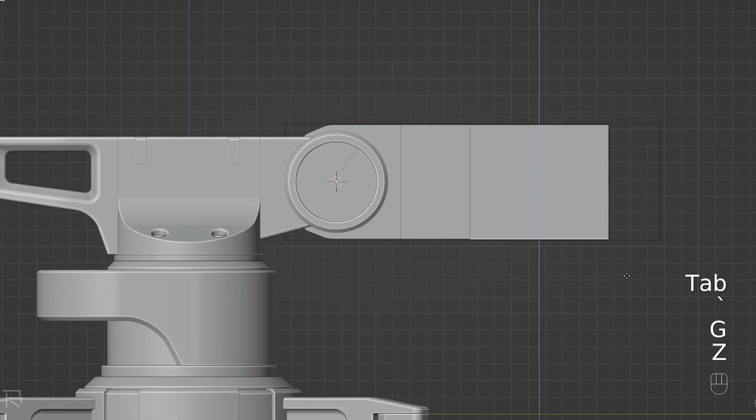Let's cut it here with a cube like this, okay? Then actually we could chamfer these corners. So chamfer them like that, and Alt X to mirror to the other side with Mesh Machine. If you don't have Mesh Machine, you can use Hard Ops for that. Here we could actually cut it like this and then mirror to the bottom.

So this cut is gonna be quite interesting here in the middle. We could use that. We could also cut it from the top to make it a little bit more airy. So, cut it somewhere here like that. In fact, we could just follow these edges here a bit closer, and then maybe here, and just bevel it a little bit here, maybe 8 segments or maybe 6, and cut. Cool. This will introduce some lightness to this structure.

Maybe it's a little bit too deep here. Let's move it closer. So I will scroll and GY and move it closer, so it kind of doesn't overlap with this bit in the front here. Maybe that's a little bit better. We can think about it later.

Here in this corner we could have some bevels, so I will scroll and grab this edge here and maybe bevel it a little bit. So let's say 8 segments. It's gonna be a little bit rounder and sort of a better transition.

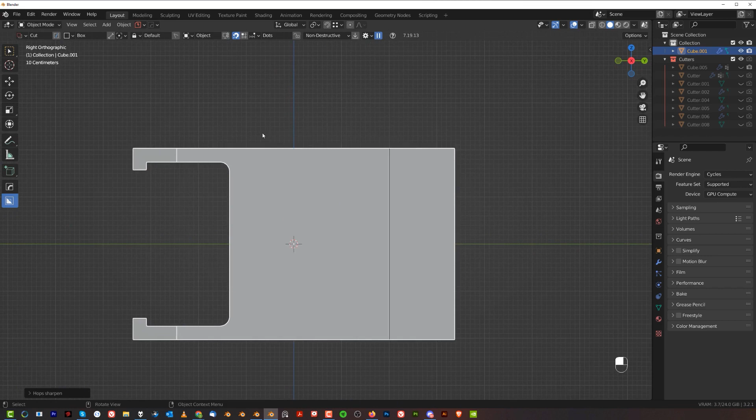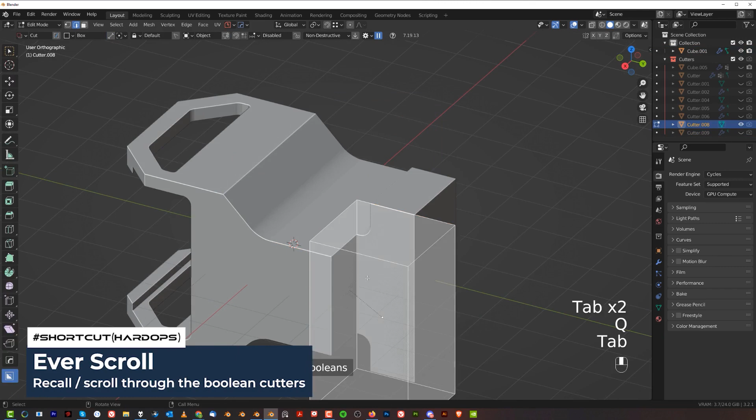So I'll click on sharpen, and now let's see, we could technically cut it in here with a bevel like this and going up, and then B and scroll and create like a beveled cut here. That's gonna be quite interesting, I think. This one could be beveled as well, so I will scroll and bevel this. All right, there we go. So you're gonna have this kind of nice transition here.

This is gonna be difficult to control shading with, but we don't really need a physical bevel. We can have a bevel shader. Through mask also we could add some loops here to give some support for this cut here. The same here, I will scroll and add some loops here, with Control R. So Control R and scroll to add some loops here, more support. It's gonna clean up the shading a bit.

Here on top, what we could do is use a bevel, but we can do it later. And here in the middle we could cut it through, so let's do it from the front, and we're going to grab a square and maybe cut it in here like this, and then bevel it, and press Tab, B and scroll it to maybe 8, maybe 10 segments is fine, and bevel it from the front here.

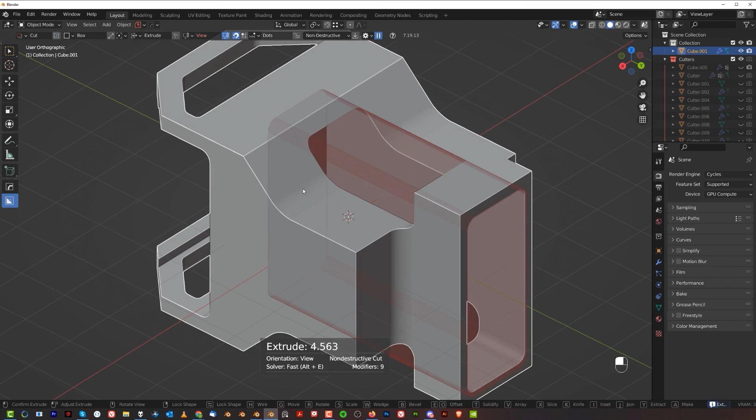If your computer is slowing down, what you can do is turn off the bevel. Should help a bit, okay? You could press Q for quad bevel, so B and Q to bevel it on all edges, so it's gonna get beveled here as well. And we got a cut here on the bottom. That's actually quite interesting.

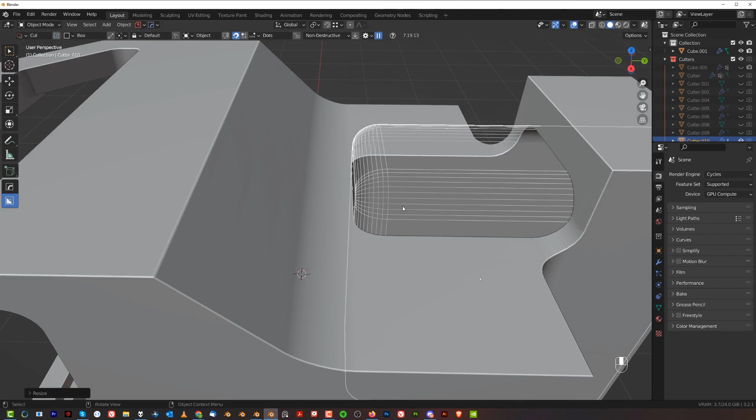It may be a bit too thin here, so we can just ever scroll it and kind of scale it in a little bit, and SY and scale it in here. And make sure that it doesn't actually encroach on the bevel here, because this is going to be an absolute bastard to fix. So if you don't need a headache, don't create yourself headaches, okay? Cool, this is pretty good.

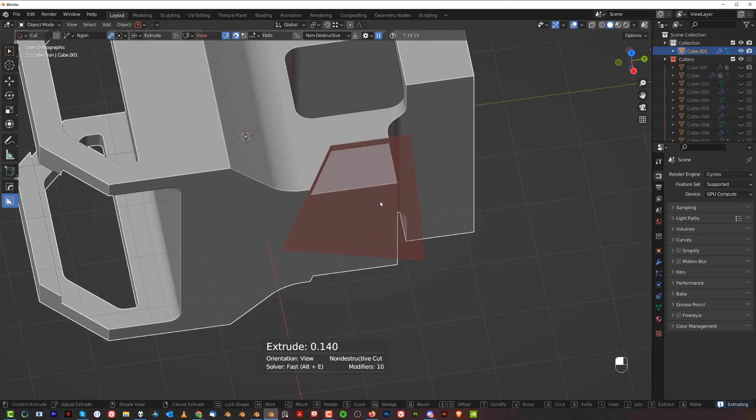Here on top of this, we could have another cut, maybe something like this here. So let's just cut it through E and cut through it, and then press B for bevel. Turn off quad bevels by pressing Q and create this kind of a cut here. This is interesting, and this could be beveled. So now we're going to apply everything. So ever scroll and operations multiply.

Select this one and bevel it. There we go. There's some problem on the bottom as well. So let's remove the double edge. Let me see what's going on here. This one, right? Yeah. There we go. And one more time. Perfect. Alt X to the other side to mirror it.

We don't need any of these here. So we could technically use mesh cleanup, but I don't want Hard Ops to remove too much geometry, so I'm just going to do it manually. And here we can bevel this as well and mirror to the other side, and there you go.

Here in the back we could have a large opening for a circle or another square. So let's go to square and let's do something like this here. Select that, draw a rectangle here, press B for bevel, and then J to connect it, E, and insert it a bit inside and then outside here. Create this kind of like a pocketed sort of, I don't know, connector or something. And I'm gonna run power save.

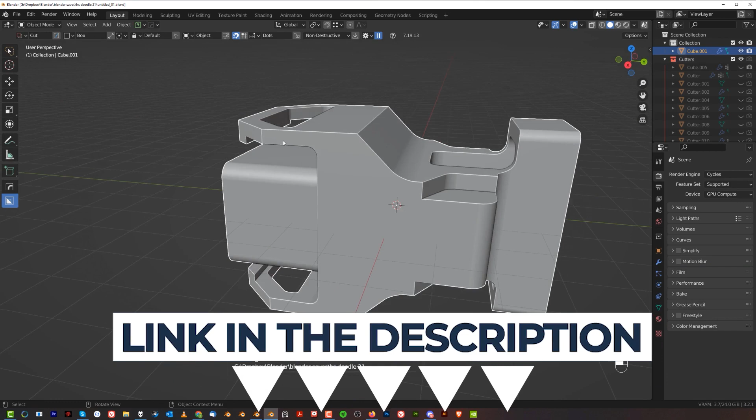Here we don't really need that. I'm gonna try to run cleanup, so operations clean mesh. It's gonna clean all the junk that I don't need. Let's run a bevel so it's gonna nicely kind of flow into one another. This one also could be beveled. That's a bit more tricky to do.

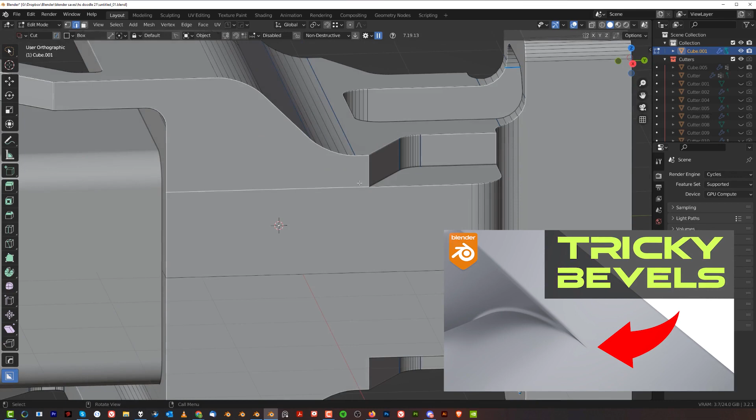We're gonna do that in here. So we're gonna give this bevel something to run on, create something like this, and then clean the mesh, and symmetrize it to the other side, and you got this kind of an impossible sort of a bevel here. Cool, that's pretty cool. I like that.

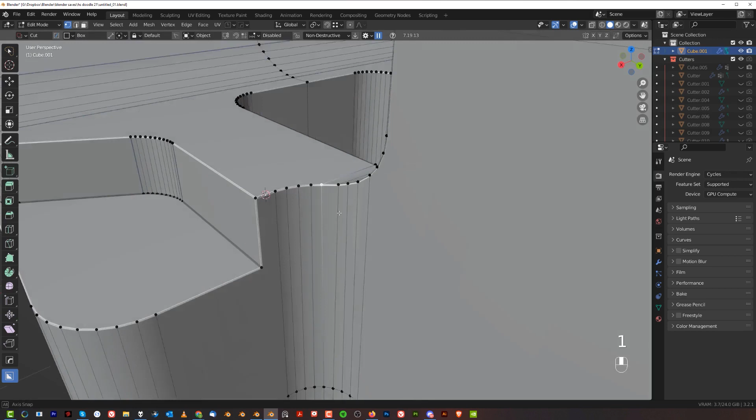Here too, technically we could have a bevel. It's going to be really difficult to do because this one is really close. Limitations of poly modeling, but you can drop the loop here. So let me see, we could do that. We could shift 1 here, shift 1 and shift 1 and shift 1. In fact, this one should be going up here. And then possibly we could maybe relax these. So go to loop tools and relax and shift R a few times. It's going to space them nicely.

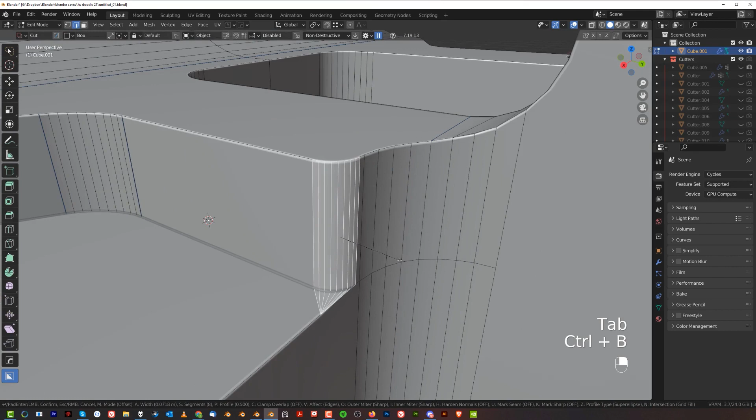There we go. And then we can run a loop here and shift select this one, Alt A, move it down, so it's going to be on the same level. Connect them with J. And by doing so, you got yourself a connecting edge like this. And we're going to clean mesh and mirror here and mirror at the bottom. And you got these seemingly impossible bevels running all over the mesh. People are gonna be looking at your Blender model, going, how the fuck did he do that?

So here we could also bevel that, because reasons. And we could also bevel that, so it's gonna nicely flow. Maybe that's too many bevels. This could be actually sharp. This could be actually sharp. Cool, cool, cool. Alright, actually, in fact, these could be beveled as well.

This could be some kind of like a plug, slot, whatever. We could have some kind of massive screws here on top. Or even here, we could drill some holes and introduce some screws. Or maybe from the top. Oh, this could be interesting.

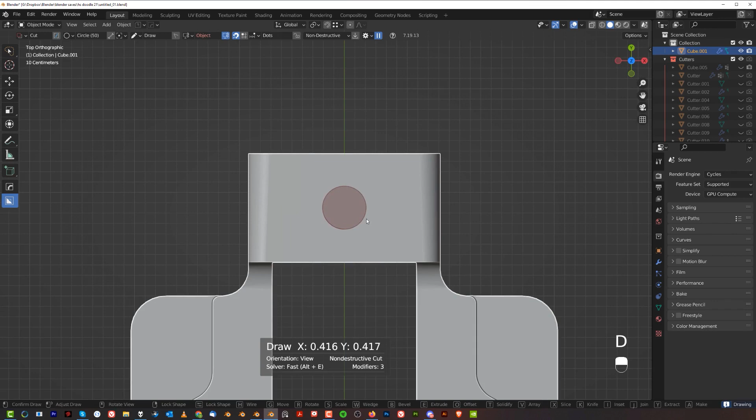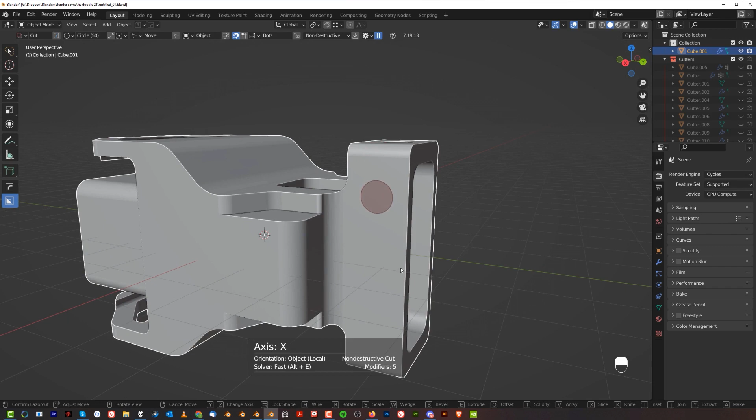So here, I could just drill a hole, you know, through it, right? And introduce some massive screws here. And in fact, here too on the side. So you hold control by enable dots here. Then you can hold control. And I would suggest you not being in orthographic mode, although it kind of works in orthographic, but perspective is better. And then let's just move it down here, GX, and cut it, and then we can actually mirror it to the bottom like that.

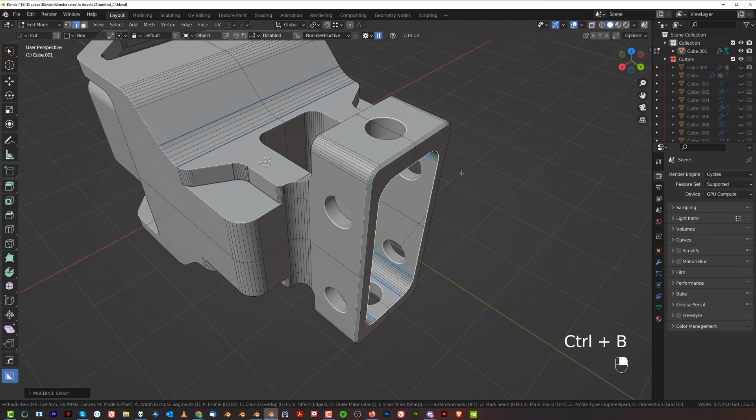Cool, so we got these holes for some supporting brackets, so we could have some chamfer here, for sure, and maybe a larger one, and definitely chamfer here. Chamfers are very important for edge readability. You want to run chamfers on your mesh, and they're really essential, guys.

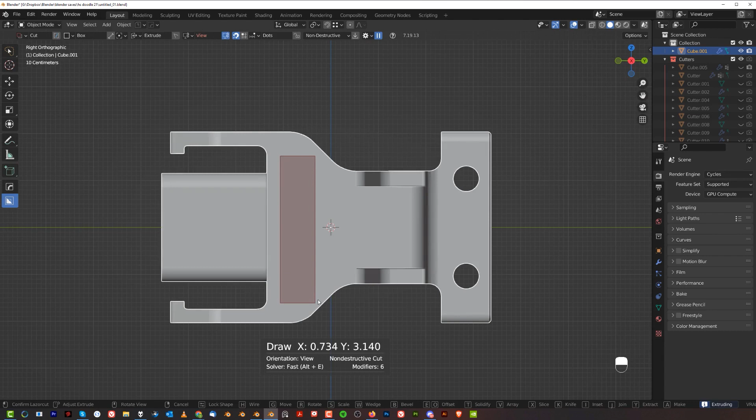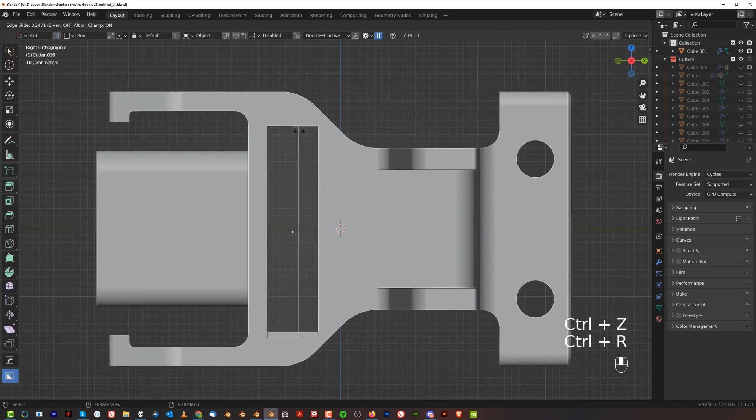Here in the side we could have some opening as well, just to add more lightness to this structure. So we could have, for example, opening here, maybe like this, and shift click, and then we're going to grab this face here and scale it down so it kind of more or less echoes these edges. But you know what, let's go back, let's Control R this here, and then grab this face and scale it. I think it's gonna be better. Yeah, so it kind of echoes these edges but also echoes this shape, which is kind of interesting.

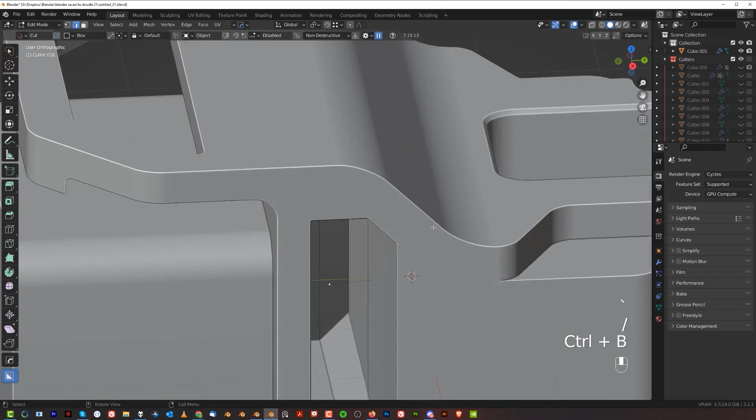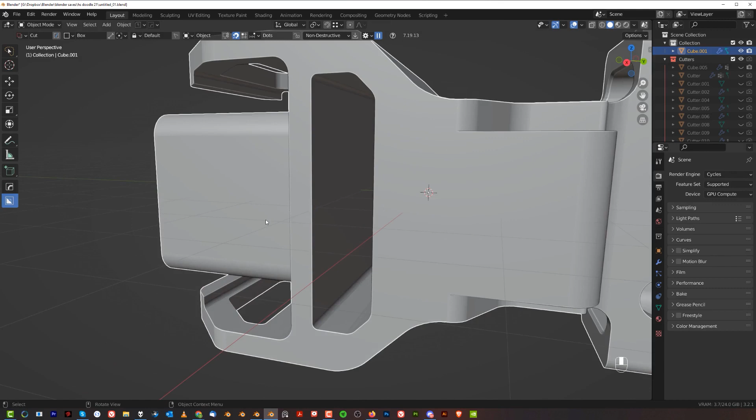So now we're going to grab this cutter, and in edge mode, Alt Control click to select all the loops, and now we can just bevel this. So Control B, and bevel that here inside. This could be some connection here in the middle. So here we're gonna grab this face and Q, boolean, and selection to boolean, and one more time. Oh, this boolean is not applied yet, so operations. Do I want to multiply this already? That's a good question. I think it's okay. Okay, so let's apply this.

Let's grab this face, Q, and let's just go here to booleans and selection to boolean. Scale it in. Don't overdo it, because you're gonna collapse it on itself. That's a little bit too deep. Although, you know what, this could actually work. This is too deep here. GY, move it in here, and in fact what we could do is move it somewhere here. Yeah, let's apply this. Operations multiply.

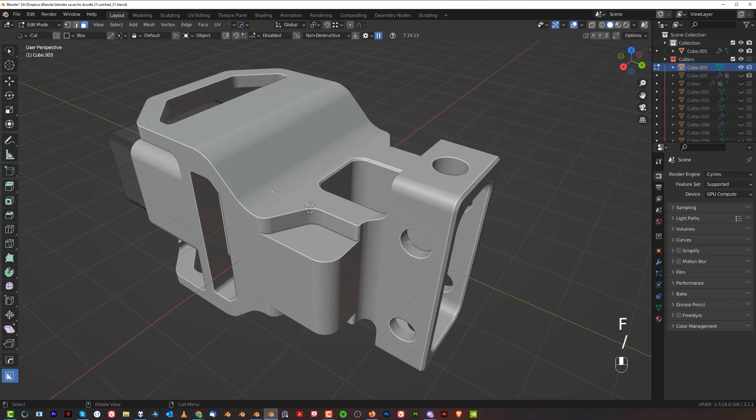Grab this face here and inset it. And now, because we did that, we're gonna have a problem with bevels, but we can fix it with unfuck. So unfuck and fix this with MESHmachine, and then we can symmetrize it to all edges. Grab this face here in the middle, press F, and we can actually extrude it. So E, and extrude it in here, which will cut really nicely through this opening without creating many problems. Here in the front, what we need is a nice round bevel, to create this kind of beveled structure, which is gonna look pretty cool. Awesome, so we got that going on.

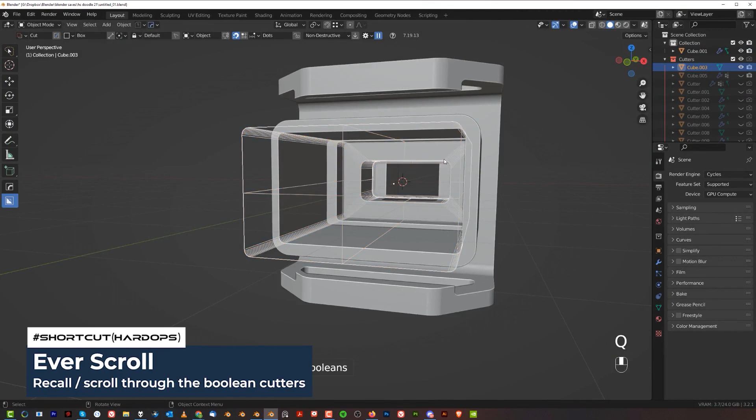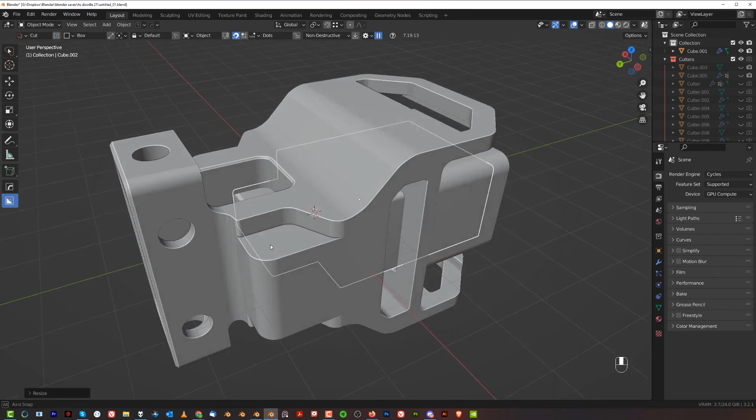Let's grab this cutter, scroll, and we're going to switch it to solid shade. So shift click on shade solid, and now we got this here in the middle, which could be some kind of device or whatnot. So we could cut it here, like this. So it's gonna stick out sort of from the back, and we could just add some handle or whatnot here in the back. And here, let me just scale this a little bit. There we go. This could be maybe a cooling system or something like this.

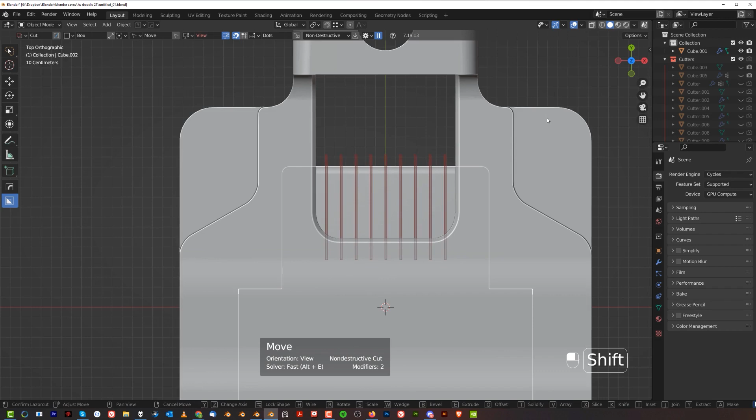Press V, and we're just going to array this here, and GX, move it here, and cut it. And you're gonna get this kind of situation here. It looks pretty bloody cool. Okay, and here we could have some trim sheets through it here on top. We don't have quads here because of this. That's fine. We can symmetrize it to the left and then we can run quads, right?

Yeah, there we go. So we could have some trim sheets here. We could have some kind of securing strip on top. For some reason, this one needs to be applied. So operations, multiply, and let's run a bevel here, and let's actually run a chamfer on this side, okay? And then control click on sharpen and sort it, boom.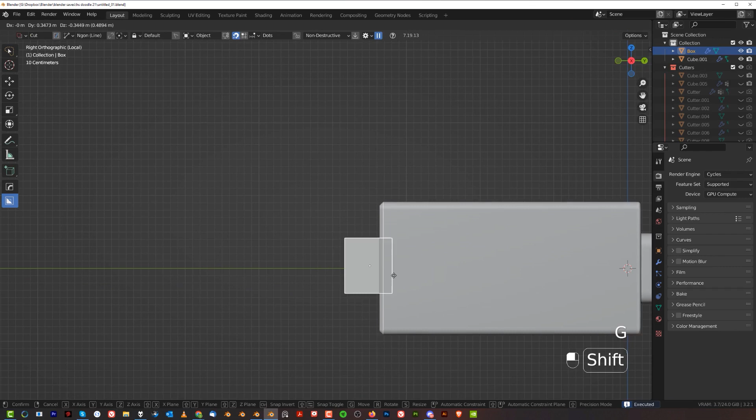And we could just drop it in here. Make it a bit more narrow. And, whoa. And extrude it over there into this shape, right? Mirror to the other side. We could easily bevel these to make them a bit more round. Bevel this one as well. Mirror to the other side, and then boolean and union, and there you go.

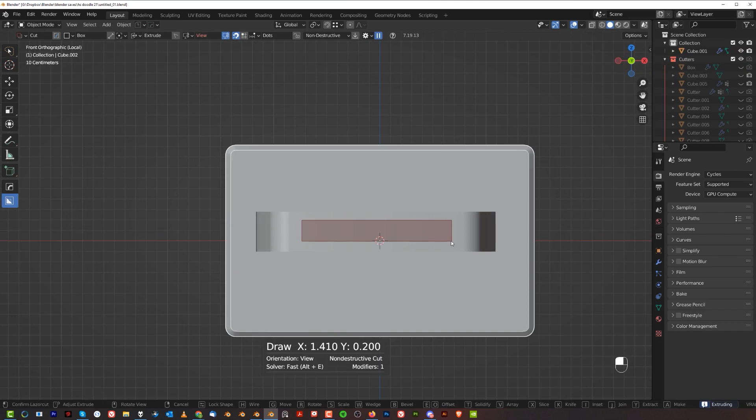And here we could have some opening holes, whatever, running through that to make it a bit more open, and then simply mirror, right? And then we got this kind of slottable device or some kind of a battery pack, whatever the hell it is. And like I said, this here on the side could be chamfers.

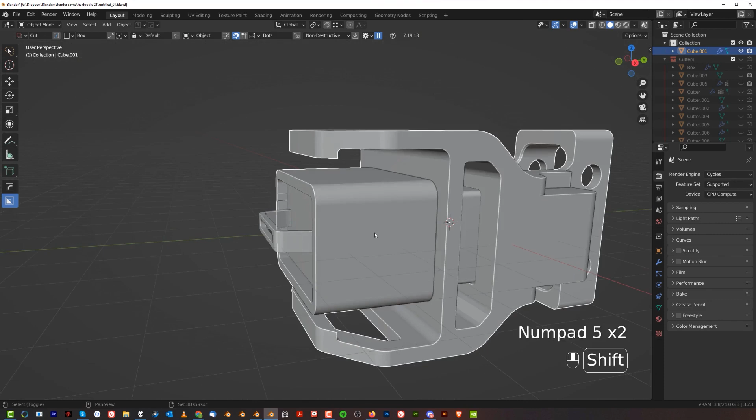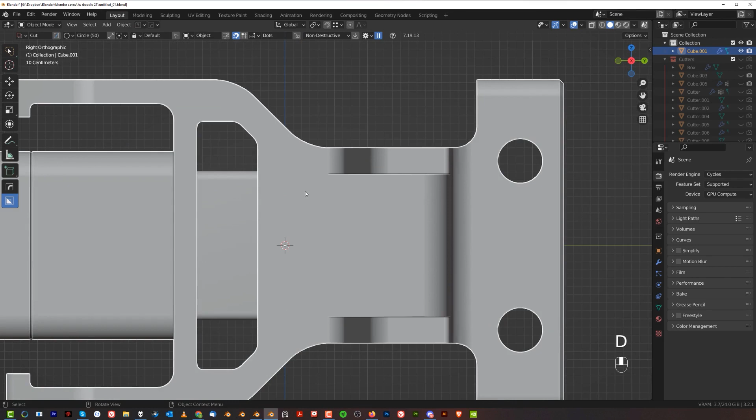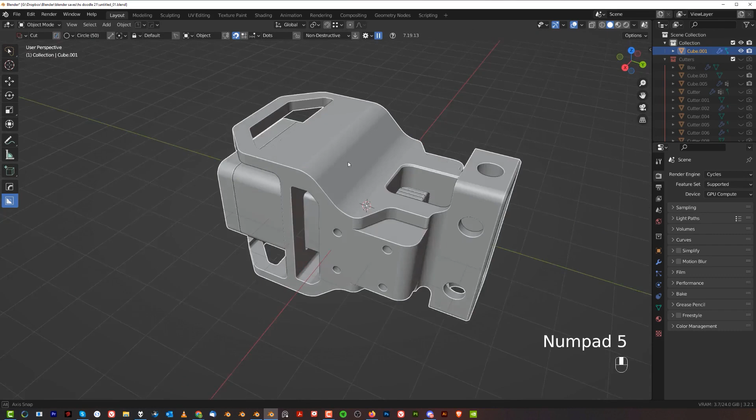Draw it in here, press V, scroll down, and you can change the axis with X, by the way, here. And we're just gonna mirror this, holding shift to the right and the bottom, so it's on all sides. That looks pretty cool. Kind of wraps up this surface. The top could be very plain. That's okay. This is still a bit rough.

I think this actually could be rounded up, to be honest. Oh, chamfered. This could actually work. Actually, no, maybe that was gonna be better. Kind of roundish here. Probably gonna be a bit more soft on the edges here. We could just Alt click and select this loop here around and chamfer it.

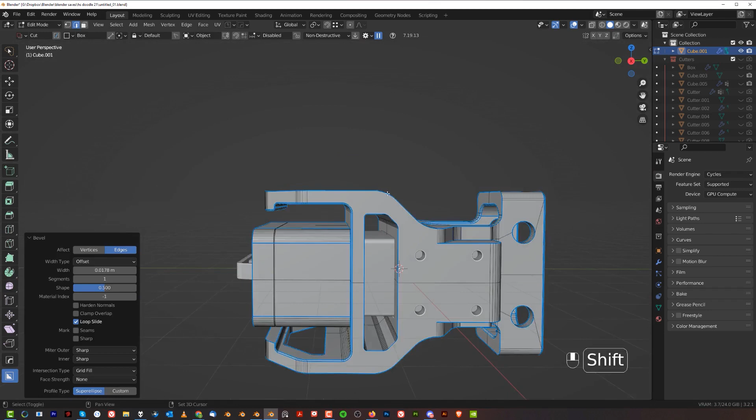Okay. You want to run chamfers everywhere you can, but make sure that these chamfers come in different sizes. You don't want them to be of the same size. Some of them have to be bigger, some of them have to be smaller, like this one could be bigger, for example. This one here in the bottom could be smaller. We could just Alt click here. See, now because we got all these sort of bevels here, this chamfer flows very nicely.

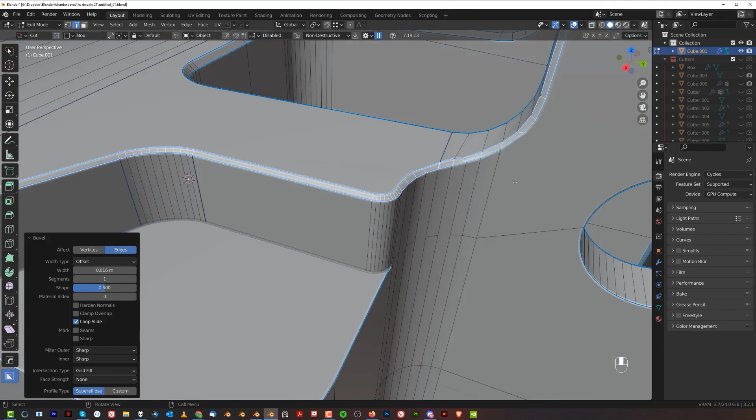There's a bit of a beef here, but we could actually turn off loop slide and fix it. There's a problem here with this. Here I can actually run an edge like this, and this will slide on this edge, no problem. There we go. This is a metallic surface, so remember it's gonna be a bit rough around the edges, right?

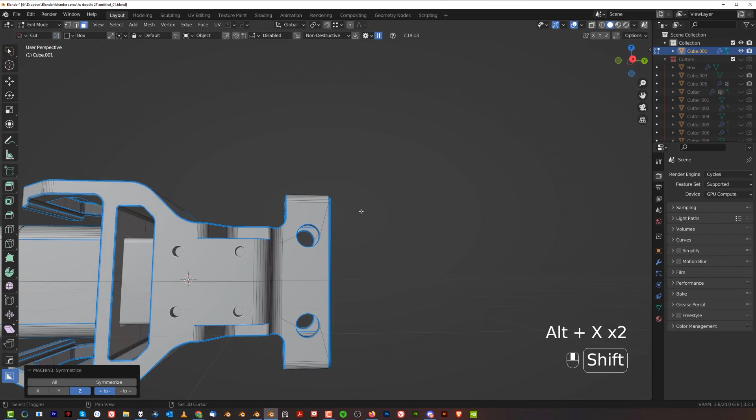Mirror to all sides, and then, well, this thing needs a better connection, so let's grab a knife and connect it in here, and then we can dissolve this. We can then chamfer this one here and mirror everywhere with MESHmachine. Or symmetrize this one here too. This could be actually bigger, just for fun.

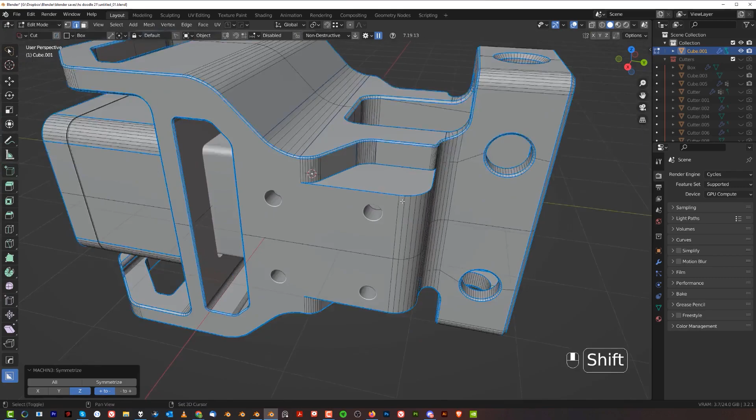There's a chamfer here. This is gonna be probably impossible to run chamfer on. We can actually create a chamfer with Hard Ops, so Alt and flip, and then Control B. If you flip a face, you can actually chamfer it like that, which is pretty cool on a live boolean.

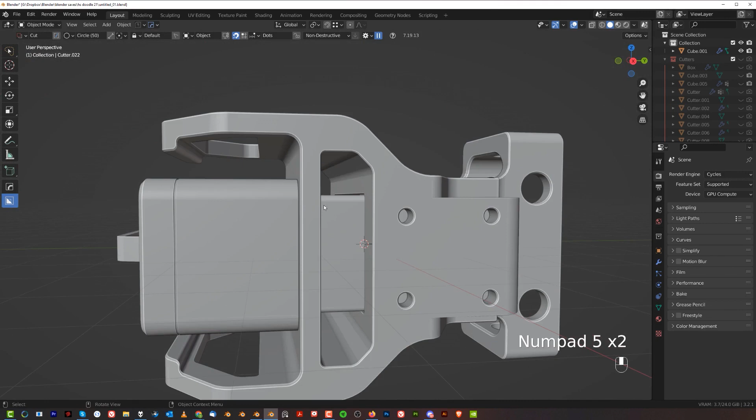So if you didn't know that you can do that, now you do. Here too, we could make this a little bit more light, or we could actually run some trim sheets here, or you know what, we could actually have some kind of, let me see that. Yeah, we could have some kind of grooves on the side or whatnot.

So here, we could run, where are these cutters? Let me just grab these cutters here. Have a scroll. These ones, right? So let's grab them both, and we're going to duplicate them, and then GX and kind of sink them in a little bit. Or in fact, you know what? Let's grab that face and GX and move it in like this, and then boolean and union.

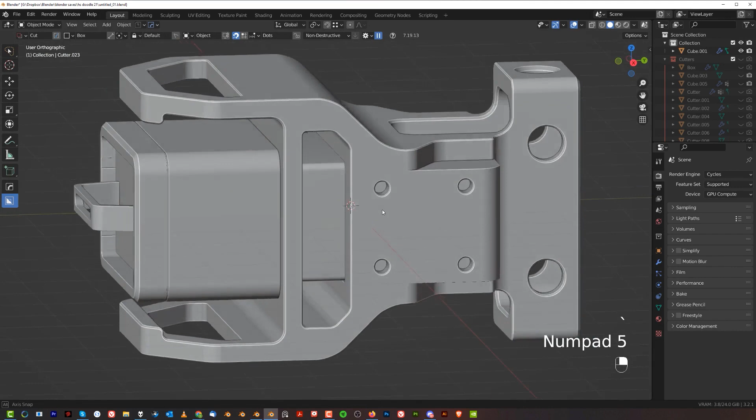Okay, let me see that. Then we're gonna move them a little bit deeper, right? So have a scroll and then GY and move it in here. So you can see that they actually fit in. Here we could do something else, maybe some wedge cuts on top and the bottom.

So some wedge cut here, W and Control, W again. And then we need to wedge cut from the other side because of mirror. So here one more time, W, hold Control for a perfect wedge. And let me just see that. Q, have a scroll, GX, move it deeper, and scale it like this, and array this along the Y-axis, and sharpen.

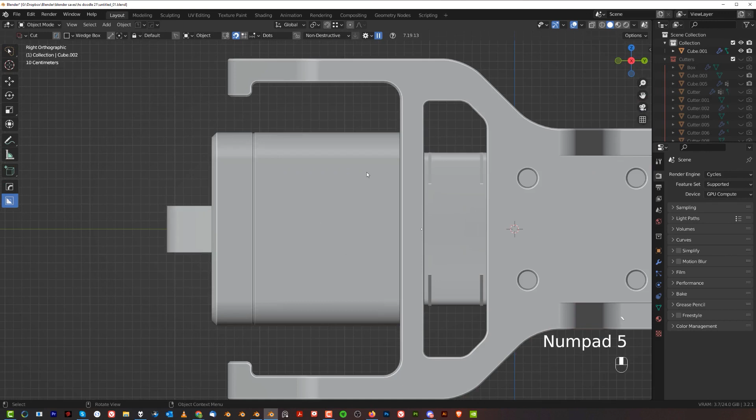Yeah, this is actually pretty cool. We're gonna have it on one side or both sides. I think both is cool. Yeah, that's a little bit of drama over there and all that. Here we're gonna have some tiny screws, but this could be done with decals. It's not a big deal.

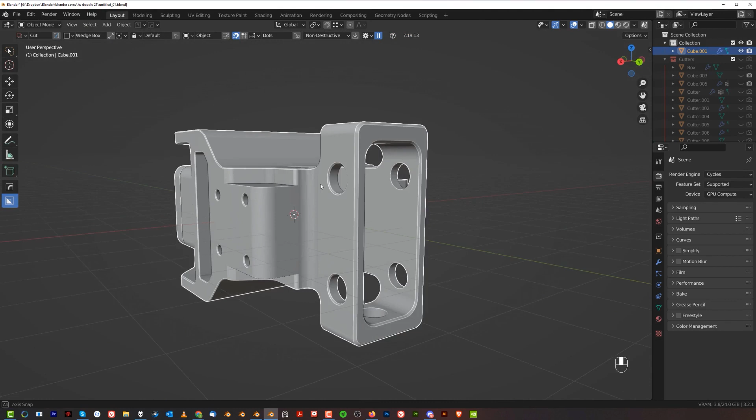Same here. This could be actually chamfered here. I think it's gonna look a little bit better. Yeah, there we go. Kind of like a sealing or something. Sort of a seal on that device. Here too we could have something in this area. Could actually have kind of like a supporting bracket here. This could be interesting. Let's grab a cube and see if we can do that.

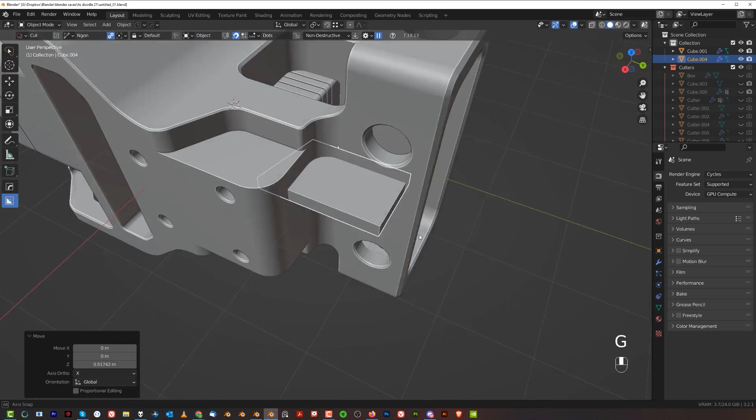So grab a cube and put it in here. Scale it, of course. And let's move this somewhere here. And we're gonna have to cut it from this side, because we don't need that part. We only need this bit. GZ and move it up here. And we're going to have to cut it as well. Here like this. Okay, so cut it, right? And this could be kind of like a supporting edge.

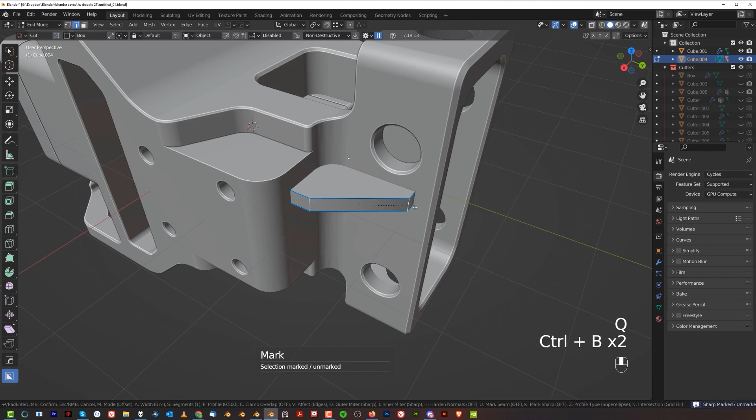So sharpen. And we could actually bevel this, clean it with machine tools and bevel these. You can actually unmark it before you bevel because you will not need these marked edges. And what we could do here is actually make this a bit thinner and Shift D, Z and move it down and combine them into one, so Control J. And we're going to union that and mirror to the other side.

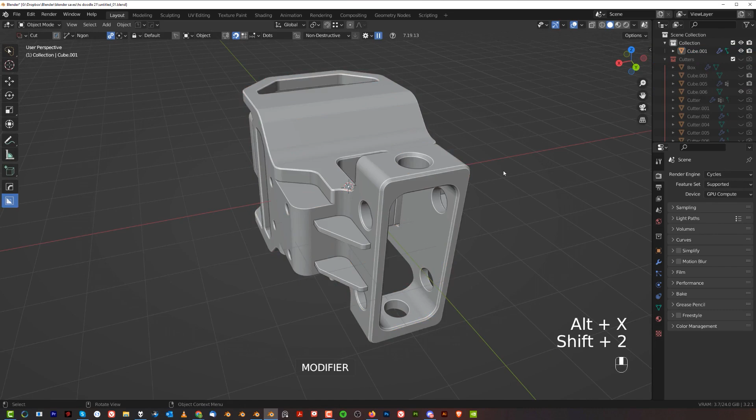Okay, so now we got these kind of supporting bits here that add more structural strength to this device. Okay, so here now let's do operations, multiply. Let's grab this bit here, Control, curve extract. Let's go to local and let's fix this, because this is going to overshoot and this is going to overshoot, right? So here we can actually fix it with machine tools.

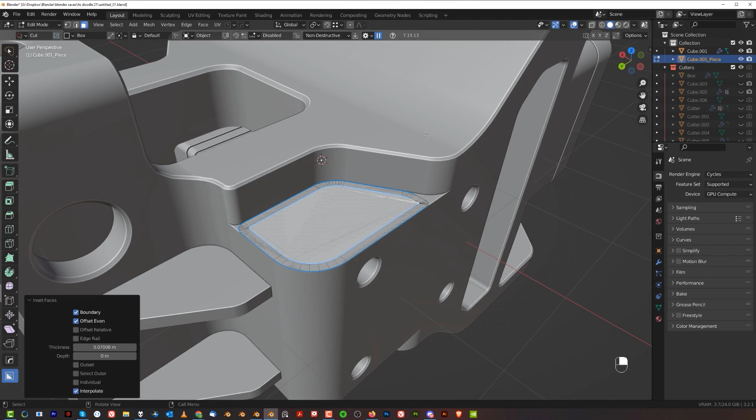Select all this and left, and then collapse them here and create a corner like this instead, sharpen that, select these two, Shift Control B and corner. And that's much better. And now what we can do with this, we can actually inset it a little bit like that. We will have to fix this corner here with unfuck. So unfuck and do that. And we should be peachy, right?

So Control I, X, and remove faces. And in fact, this corner here actually is fine. So now, let me see this corner here. Yeah, this needs to be fixed with unfuck as well. So unfuck and make it a bit more round. There we go. Go to modifier, solidify, press 2.

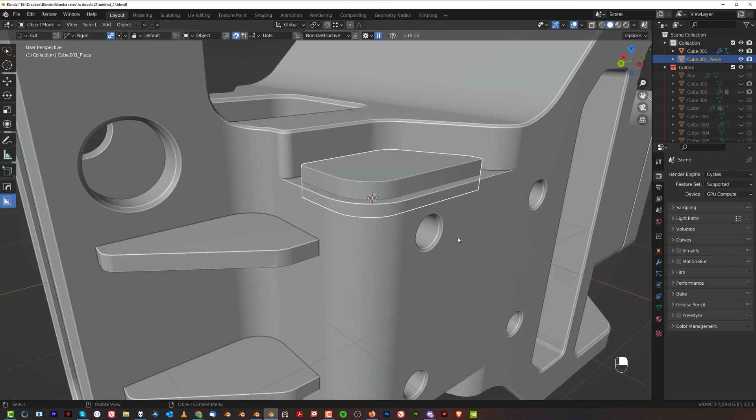Now make sure you're going to remove the bevel, because if you apply the bevel, this one's going to be a bevel and difference. And we could just mirror it to the other side like that and to the bottom. And there you go, got a bit of a cut here, which adds more interest, visual break, light breakage. In addition, we could have tiny screws in here on top as well. So we could just drill a hole in here.

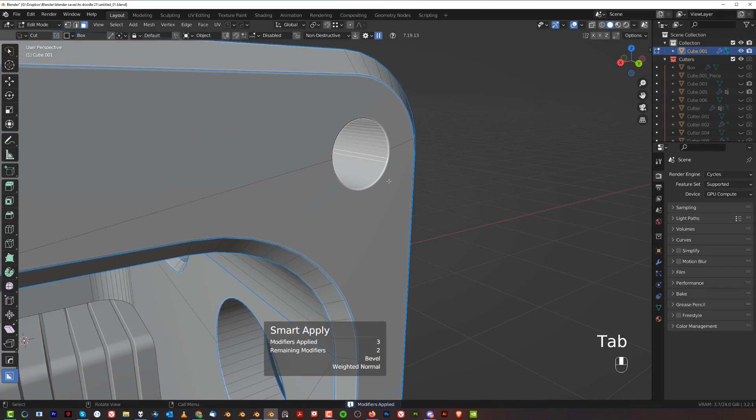Maybe not through, but somewhere like that. And let's apply this. Operation Smart Apply, and then we could actually use the mesh machine screw. So right click and thread, and we could add some threads here just for fun. Well, it's maybe too many. How are we looking? Yeah, we're looking pretty good. So let's just mirror it to here and here, the bottom.

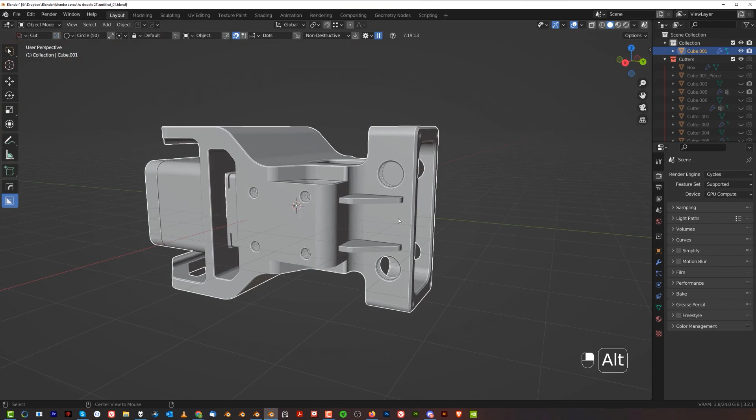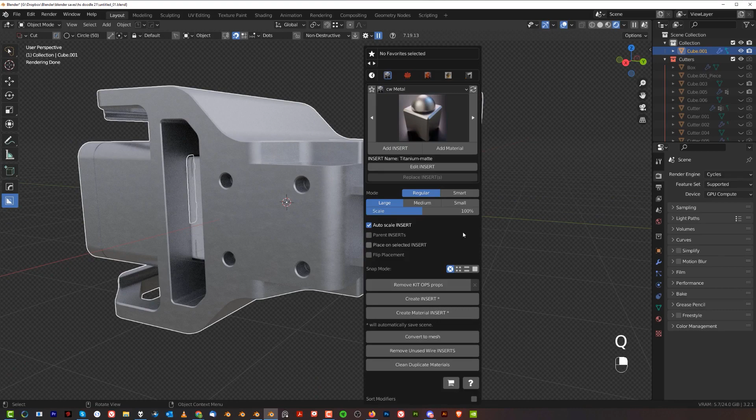We're gonna add some matte titanium to this mesh, and it's gonna look pretty cool. There we go. Was it matte titanium? Titanium matte, this one, that's what I want. There we go. Oh, that's lovely. That looks really cool. And here we could have, let's say, the same, but maybe shiny titanium. Or actually matte titanium as well, but of a different color.

So grab this titanium. In fact, we got a problem here with this boolean, you see, because we mirrored it to the bottom. And this is what happens. So let me show you how I would fix a mesh like that. That's actually a kind of interesting conundrum. So this is really easy to fix, guys. This is the middle of the bevel, right? So all we need to do is go to occlude with, actually that's going to be a bad idea.

Let's just grab a B selector and select all these verts here, and this one, and this one, I think. And go to back view here, and Alt A and move them to the left. Boom. Okay, and then press 3, and then we're going to go to Operations Clean Mesh, and boom, and you have your mesh sorted.

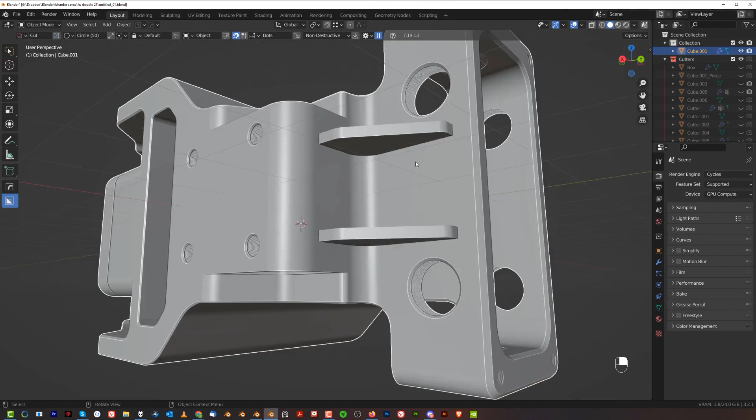Okay, so if you have a problem like this, don't panic. Think what to do. Always think what kind of tools you have at your disposal. Remember, you have all the tools you need to get everything done. There's nothing you can't do if you have proper add-ons or know the tools in Blender, because you do not always need add-ons to fix things in Blender. Sometimes you just need Blender.

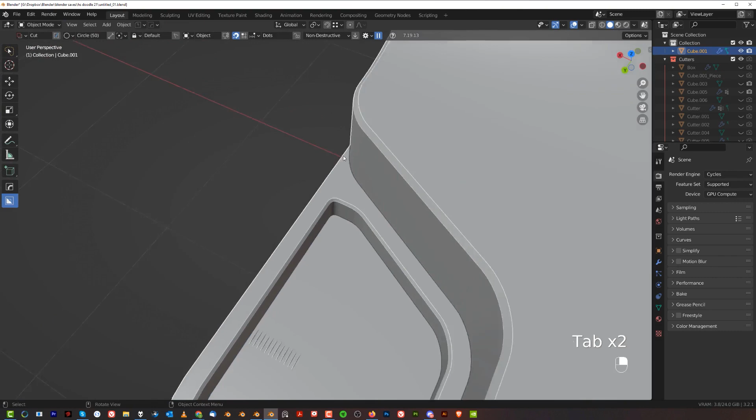Here too, let's add the chamfer, and set the chamfer here as well, and then let's mirror it down and mirror to the right. This is gonna create some really interesting planar shifts. They're gonna really nicely read the shapes here as well. Let's just add a little bit of a chamfer. It doesn't have to be large, it can be small. Did I pull something in here? No, I didn't. Fine. Cool. Just mirror to the other side, and you're good to go.

So there you go, guys. I think we're cool. So let's go back to our titanium look. There you go. Looks pretty decent. And this one could be a little bit darker. Okay, so go here and just simply drop the value. And not on this one. Actually, you know what? We could drop the value on this one. So click here to duplicate the mat and just simply drop the value on the main one. And the bit in the middle is going to be of a different color. That is pretty cool.

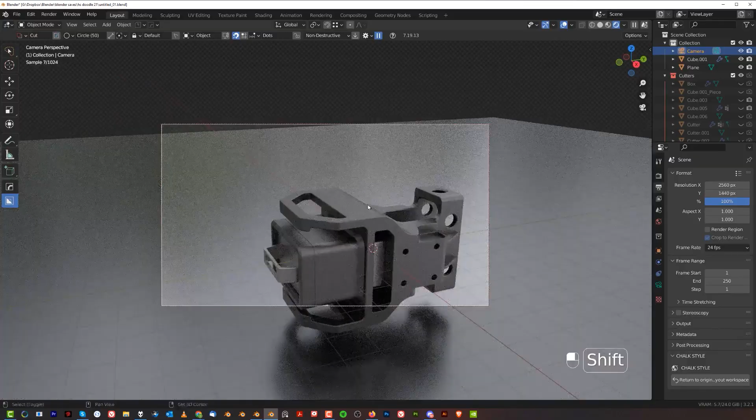And then all you need to do is render this. I'm not gonna be rendering in this video because it will be too long, but you could just drop a mat and put a camera here at a nice angle, and then you're good to go. So maybe something like this, and camera to view, and zoom it out a bit. Maybe change it to something a bit taller because that piece is quite large, and frame it like that so you can actually see more or less.

If you want to sometimes show more different angles of the model, you can create a larger framing and then grab this one and rotate it, and you're gonna see basically more of the model, right? But you could put it somewhere here, and maybe some kind of logo here through the middle of the screen or something like that. So anyway guys, that's it.